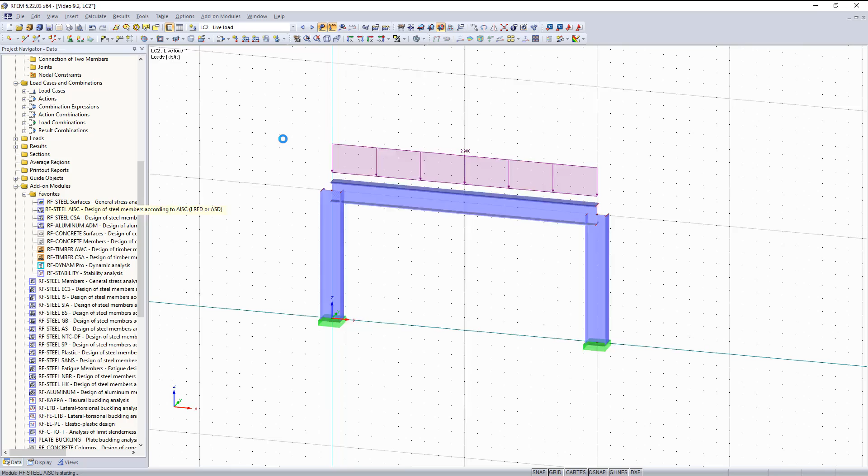To access the add-on module you can go into the project navigator on the left side here and double click it. So as you can see, the add-on module is basically just a dialog box, and in this dialog box for this video we'll just be going over this input data and what you need to do to set up everything in here before you run your results.

First thing I would like to do is select the columns, because these are the first things we're going to design. Then I would like to pick which method we are going to use. We're going to use LRFD. And then the next thing I would like to do, under the ultimate limit state tab, is choose our load combinations that are only for LRFD, move those over to the right, and then I would like to rename this case columns.

We'll click OK, and then basically everything in this general data section is filled out and complete. We're not going to worry about serviceability limit state for the columns. So the next thing we can do is move on to materials. For materials, we're going to select steel, and as you can see, these materials are automatically brought into the add-on module and we don't have to do anything further.

The next section I'd like to move on to is cross sections. The same thing can be said for this section as for materials. They're automatically brought in from RFEM, so we don't have to do anything here. The next information I'd like to move on to is the intermediate lateral restraints. Here we're going to define lateral restraints for the top and the bottom flanges.

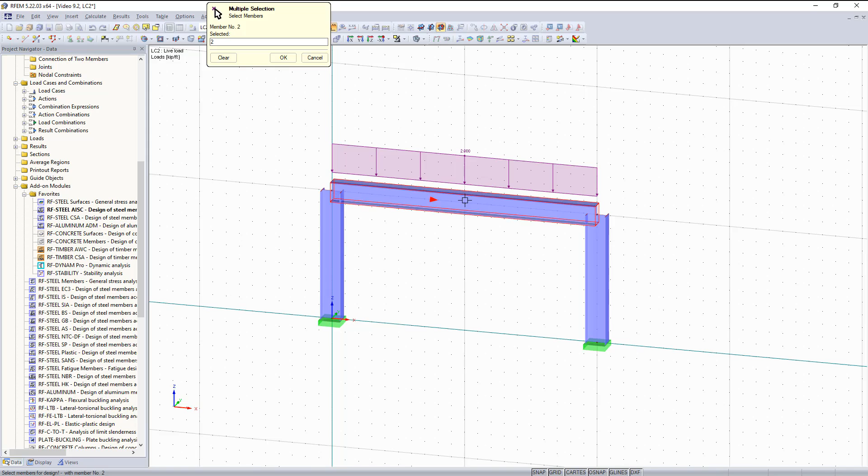For the beams, I'm going to go to Design Of, hit this button, and then I'm going to select our beam. For this case, I would like to design it using the serviceability limit state, and then I'm going to go under the serviceability limit state tab right here, and select only our serviceability limit combinations and result combination. Move those over. So that is it for the general data.

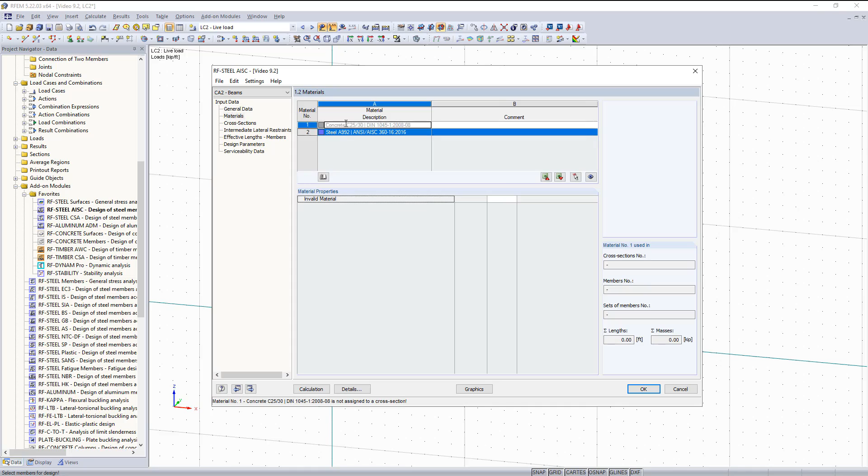Materials, these are already imported in. Cross sections, we don't have to change anything. Intermediate lateral restraints, we'll keep those on the top and bottom flange. Our effective lengths is unchanged, along with our design parameters. And then under serviceability, this is what is going to be different for our beams compared to our columns. This is how you're going to check your deflections.

So now we can go in and select our members graphically. We're going to choose reference to member. Member number, we want to choose beam. We are going to keep the reference length as the full reference length. You can change this manually if you would like. And then you can set this beam type to beam or cantilever.

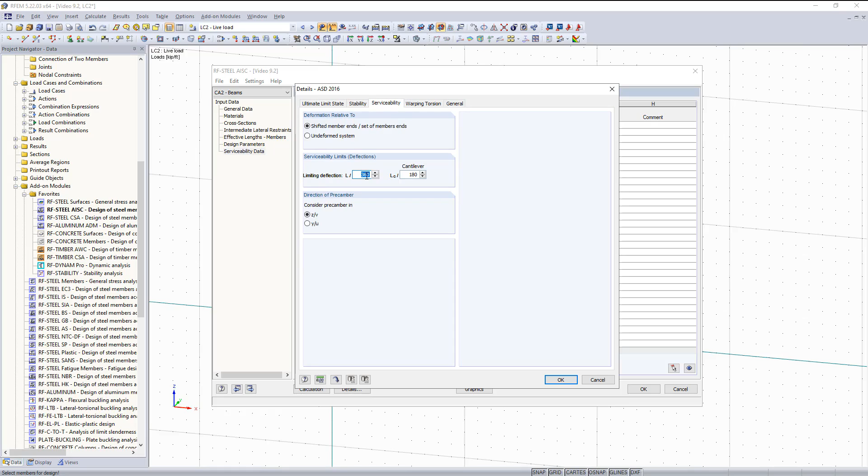So now the question is, what is this going to be compared to? Well, we can go under the Details tab. And here's where we can adjust our limiting deflection up here under the Serviceability tab. Right here is where you can change your serviceability limits, such as your L over 360 for your limiting deflection. Or if you have a cantilever, you can change your L over 180 over here. Relativity can be changed up here.

You either have the option for shifted member ends or the undeformed system. With shifted member ends, the deflection will be measured from the new distorted shape of the member, whereas the undeformed option will measure deflection from the original structure location, and it is up to you as an engineer to decide which option to apply. Either one will give you completely different results. So we'll leave this as default.

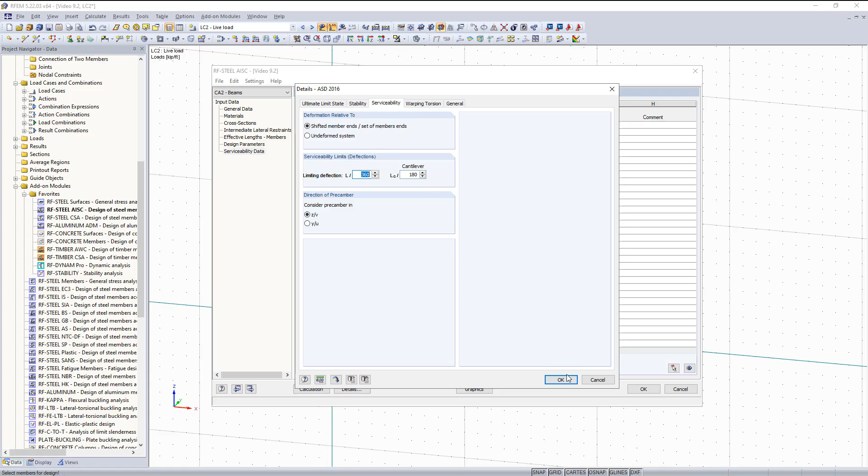Click OK. And then this pretty much concludes the first part of this video, where I basically just went over the input data for the RF-STEEL AISC module. I hope it was helpful, and in the next video I will go over how to run and analyze the results.